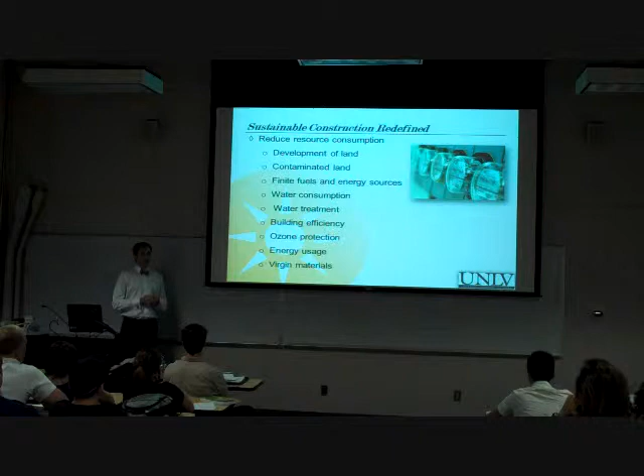Ozone protection, keeping CFCs and HCFCs out of the atmosphere, protecting us from skin cancer and harmful UV rays. Energy usage overall, and then finally virgin materials. So we want to reduce, reuse, and recycle. We want to stay away from virgin materials, virgin aggregate, virgin timber, virgin materials across the country and across the world.

So reuse resources. So development of land and contaminated land. Once again, developing in locations that have already been disturbed. It's much more sustainable to develop within an existing urban infrastructure, and it starts to lend itself to community revitalization, to sustainable communities that can last and stand the test of time.

So many cities are blighted, especially in the Midwest and in the Northeast, Buffalo, Detroit, from these urban flights out of the urban areas into the outskirts and into the green fields surrounding them. So not only are you causing detrimental effects to green fields, but you're also causing detrimental effects to the society and the economy, those other two legs of the triple bottom line within the city center, within the downtown areas.

Gray water system, so reusing something. Water is already serving its purpose to wash your hands, why not allow it to still serve a purpose by watering your plants, right? Other non-potable systems, so you'll have purple pipe recycling. You guys ever see the purple pipe, which is secondary treated? It smells like eggy water, but they use that for landscaping, so it doesn't have to go all the way through a sewage treatment plant. It can be secondary treated on site and then used on a golf course or whatever it may be. So you're not pumping it all the way to the plant. You're not using virgin water resources.

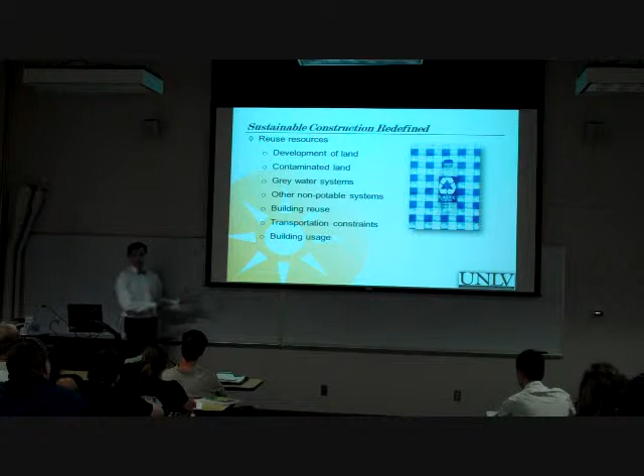So it might be more prudent to have church, like at my high school, they had a church there on Sundays, right? No one was in the building on Sundays. They had a church there that rented it out. So instead of this church having to build a new church, they just used this giant high school auditorium that fit their needs very well. So that idea of using a building for more than just its intended purpose, using it in a more 24-hour cycle.

Recyclable resources, you get to a lot of the same attributes we talked about previously. Biofuels is another good example. This is something that's already captured carbon and environmental pollutants, and if you don't reuse it, it's just going to go to waste. And so recycling that into the existing environment. Material selection, when you're designing a building, planning for a building, selecting materials that have demonstrated recyclable properties.

A lot of times you can go on corporate websites, like United States Gypsum Company, they'll have a whole sustainability section of which of their materials can be sustainable choices in terms of recycled content and where they're located. I'm working on a project right now that'll be the first LEED Silver casino in the country because they won't allow smoking. A lot of casinos might be energy efficient, but most of them allow smoking. But in this state, it's in Ohio, and you can't smoke indoors anywhere.

So on that project, they just happen to be in a very beneficial location. The Midwest has a ton of manufacturing of construction goods and construction materials, so they're really in a good region to be able to source their materials within 500 miles. And then finally, quality of materials. So you're looking at materials that are going to stand up to the test of time. Rather than going with cheap carpet or cheap linoleum, you go with terrazzo flooring or concrete flooring, something that's going to be durable for the next 50, 75 years. So you're never replacing it instead of replacing carpet every 3 years or whatever.

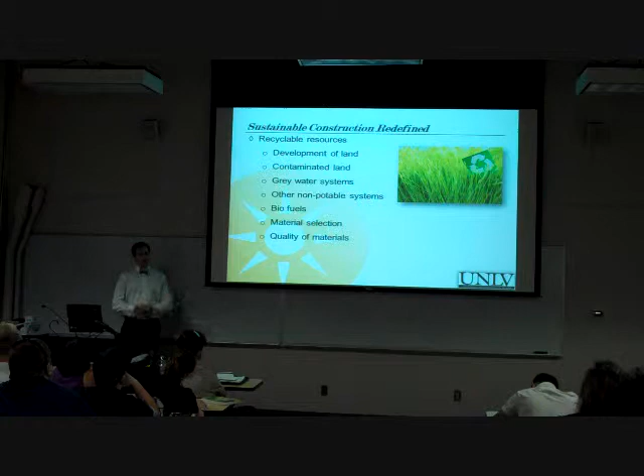Protect nature, land conservation, green space. You know, it's important for human beings to be surrounded by green space, to have access to the outdoors. The National Park idea is kind of a touch on that to the extreme, but just having a park in a city center or near your office space. Heat island considerations, like we talked about, trying to keep those temperatures down in urban areas.

Chicago has a really big movement from black tar roofs to green roofs, which are roofs that are covered with natural vegetation. This not only filters the water to a much more pure state, but it also keeps the building cool. And remember those cycles, those dominoes, right? So when you keep the top of your roof cool, what happens? You lower your air conditioning, you lower your electricity bill, you're not using as much coal, you have cleaner air, your kid doesn't get asthma, right?

Emissions reduction, development density, in terms of dwelling units per acre, trying to get above 4, trying to get more than just a single family home on a quarter acre, which would just be 4 dwelling units per acre, which is typical here in America. So moving to that shift.

In this course, it's not so much that I try to be political in any way or force views on anybody. This is sustainability defined, right? It's not saying that you have to live this way. What it's saying is if you were to be more sustainable, you would live in an urban environment where you walk to work, we have buildings stacked rather than a single family home. That's all I'm saying. It's not that you have to live in a high-rise building in New York City to be a good citizen, but if you want to be more sustainable, the most sustainable people live in New York, San Francisco, Hong Kong, Tokyo, right? They don't live in the suburbs of Las Vegas, for example.

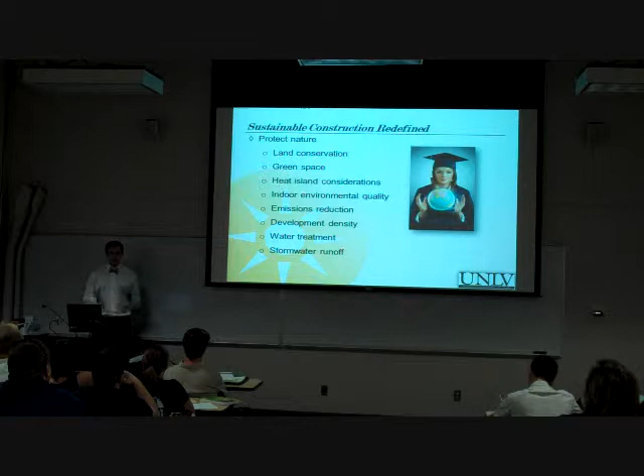So that's all I'm saying. So when I say those kind of things, it's not that I'm bashing Vegas, because I live here as well. It's that to be most sustainable, you have to move to that kind of living environment. And in America, that's not really offered very much. I would say New York, San Francisco, Chicago, and even those cities to an extent don't really offer that most sustainable lifestyle. You see people have summer homes and cars and automobiles all throughout those communities. So America in general is probably the most consumptive community on the planet. So moving from that to a more sustainable future is kind of what the course is all about. It's not saying you have to live this way, it's just saying these are the sustainable goals or sustainable questions.

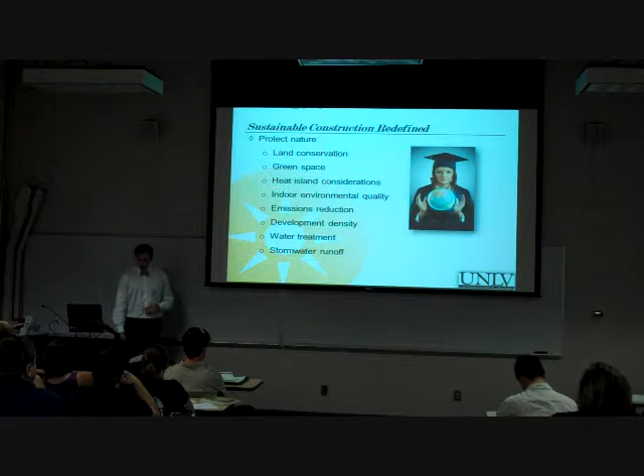Stormwater runoff. So when you have stormwater runoff, you have a large volume of water running off. That can be detrimental to surrounding areas, floodplains, and also what's running off into the storm sewer, right? Oils, chemicals, things that eventually get into our drinking water. There's always the planet, yes, but it's also the people. So who's actually consuming that water in the long run? It's the citizens, it's us, right?

Eliminating toxics, starting with low volatile organic compounds. The big one is tobacco smoke. One of the prerequisites, we'll get into the LEED rating system in detail, but it's broken down into prereqs and credits. So what are prerequisites? They are required regardless of the project type. All LEED projects have to have no smoking within the actual building walls themselves. So that's just one omnipresent stipulation.

Indoor environmental quality overall. So this can deal with cycle changes in terms of how much fresh air you're actually pulling in. When you're pulling in a lot of fresh air, what do you have to temper that with? What do you have to consider on the other end? It'd be great if you could have fresh air all the time that was cool to our standards, right? What happens when you pull in so much fresh air at a time? The condition of that. Right, so you have to cool it down each time that you're bringing in 120 degree air or 110 degree air into a 75 degree environment, right? You have to cool it down to that level.

So there's some ways to get around that in terms of how many air exchanges you have and what type of equipment you actually install. We'll get into some of those details, but there are ways to exchange some of the heat and some of the cooling between the air that's being exhausted, which is cool and conditioned, but it's dirty, it's got particulates in it, and lots of just overall compounds that you don't want to have stagnating in your environment. But it's also tempering that with bringing in the fresh air from outside.

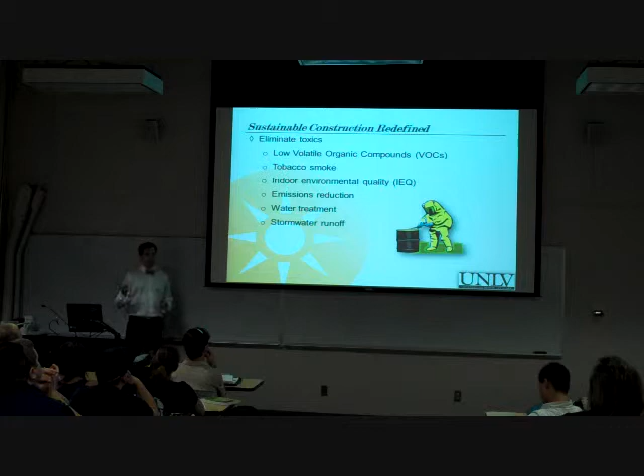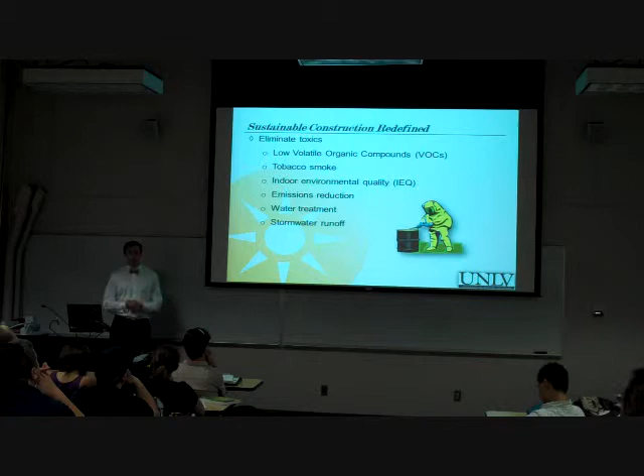Water treatment, and then once again, stormwater runoff, eliminating things that can be leached into the soil when it does rain. Copper, zinc piping that might be along some of your gutter systems can be toxic to fish that are in the local region. There's all these different steps that you kind of have to think about, and overall it's kind of a building ecology mindset.

Right? Applied life cycle analysis, present value of future benefits. The easiest way for you guys to kind of think about this is what you're doing right now as a student. So it might be costing you some money right now to be a student. You might have some opportunity costs. You could have gone and been a mechanic or something else that didn't require necessarily a college degree, but you could have still made money. Or you could just have personal opportunity costs. You could have been backpacking in Europe or sleeping and watching Seinfeld, whatever you wanted to do.

There is something you're giving up right now to be here in this room, right? You're sacrificing that to have a lifetime of the benefits of having your BS or MS or whatever it may be, PhD, right? So that same idea of investment up front to reap benefits for 40 years is the idea of life cycle analysis. Really, the crux of how building owners and operators and designers should really make their decisions for their buildings.

Reuse materials. Applying things that you have on site to the job site will reduce your overall cost to the project. If you're able to crush concrete, crush gravel, and crush asphalt right on site, it's going to be a lot cheaper than sole sourcing it as a virgin material from somewhere else, for example. Quality materials: if you're not replacing something often, you're going to get the benefit that much longer, right?

You have to look at the analysis between, well, if we install this carpet, we're going to have to replace it every 5 years. Carpet costs this much to install. About inflation, all those different costs across a lifetime, how long is the concrete flooring going to last in contrast to that? So that's the kind of balance you have to do. It may very well be that the carpet wins out because it's so cheap, but then you have to start looking at the ethical and environmental side of your business as well. Those other two legs of the bottom line. And maybe that's really cheap carpet, but maybe it gives off a lot of VOCs, right?

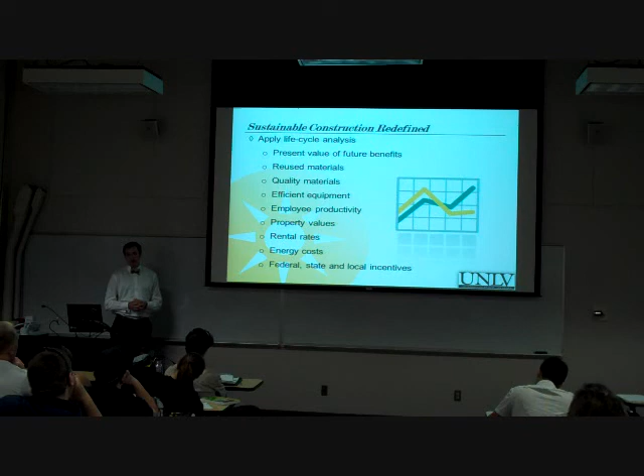Efficient equipment, employee productivity. It's not just about the actual building, but it's the inhabitants inside of it that can contribute to your bottom line. Property values, it has been shown that green buildings